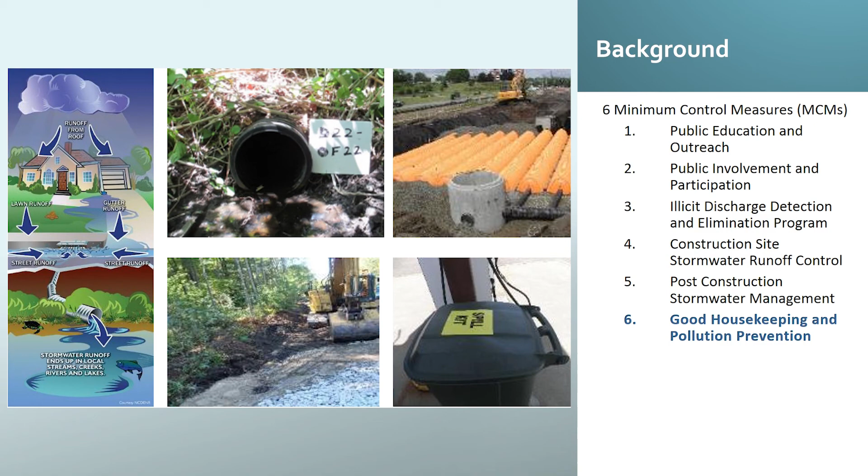But I want to make a note about MCM6. Today we're going to specifically be talking about the development of a SWPPP and then the catch basin cleaning, inspection, and maintenance program. There are other requirements of MCM6 that we're not going to specifically talk about today. That includes the development of an inventory of all your municipal operations and facilities, the development of O&M plans, and the street sweeping program, as well as a few other requirements.

So I just want to give you the heads up that we're going to be talking about 2 specific components of MCM6.

So a SWPPP - what is a SWPPP? It is a Stormwater Pollution Prevention Plan, and it needs to be a written document. But don't get confused and confuse it with a stormwater management program or stormwater management plan, which is also required by the MS4 general permit.

Think of the stormwater management plan as the master plan for your MS4 general permit. It will outline the requirements of, or outline the ways, the intent of how the MS4, your community, will meet the requirements of the MS4 general permit.

The SWPPP is specific to your facilities. And you probably are familiar with SWPPP - it's not a new term. It's been used in other contexts outside of the MS4 general permit.

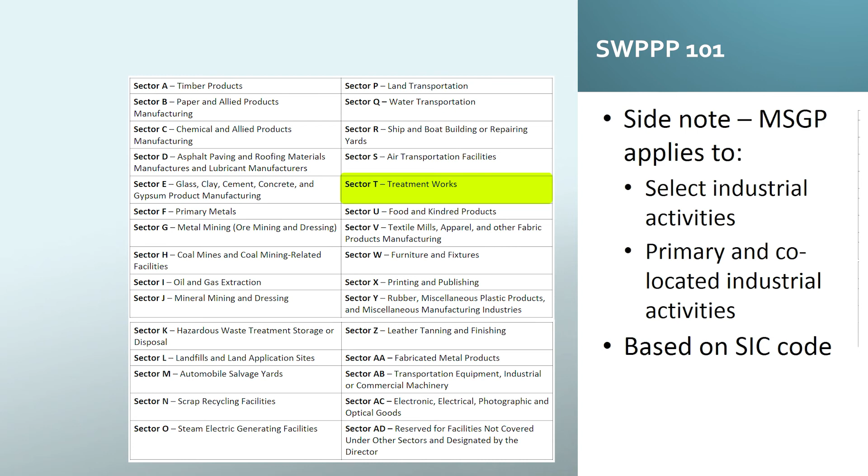You probably would most be familiar with Sector T, which is treatment works. So many municipal wastewater treatment plants are required to have a SWPPP under the multi-sector general permit. The permit applies to the primary or co-located industrial activities at a facility, and it's based on the SIC, the Standard Industrial Classification Code, on how you get pulled into the multi-sector general permit.

There could be instances where your facility has a SWPPP under the multi-sector general permit. For instance, transfer stations could be pulled in under Sector N, scrap, recycling, and waste recycling facilities, SIC code 5093, in particular for recycling facilities that receive source-separated recyclable material primarily from non-industrial and residential sources. If this were the case, a SWPPP for that facility would not be needed under the MS4 general permit.

Also remember, if facilities are co-located, you only need one SWPPP that covers both facilities.

So what facilities require SWPPPs under the MS4 general permit? All maintenance garages, public work yards, transfer stations, and other waste handling facilities that would have the potential for pollutants to be exposed to stormwater.

And if you happen to have co-located facilities, say your public works garage and your maintenance garage are on the same site, only one SWPPP is required for co-located facilities.

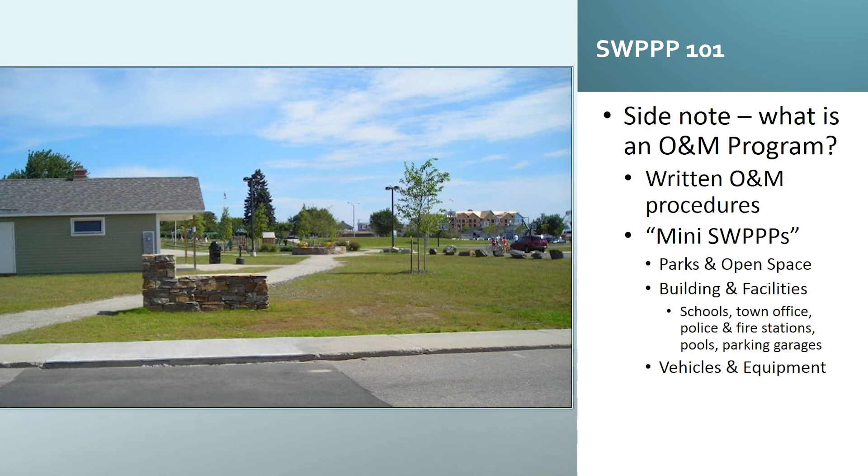This includes parks and open space, buildings such as schools if they're under the jurisdiction of the municipality, your town offices, police and fire stations, municipal pools, and parking garages, as well as vehicle and equipment activities.

Some examples of O&M topics that would be included in your O&M program would be the use, storage, and handling of products, landscaping activities and lawn care, pet waste handling, and waterfowl congregation.

It also needs to include a training component, dumpsters and waste management, parking lot sweeping, spill prevention, and then vehicle fueling, storage, and washing.

So back to a SWPPP. What are the required elements of a SWPPP? We will go into more detail on each one of these, but a SWPPP must include a pollution prevention team.

A description of the facility, both an identification of the potential pollutants as well as a map, identification of all the stormwater controls at the site, management practices that will be implemented to prevent pollution, an inspection component, and then of course record keeping. There is a template SWPPP that has been developed by the Central Massachusetts Regional Stormwater Coalition.

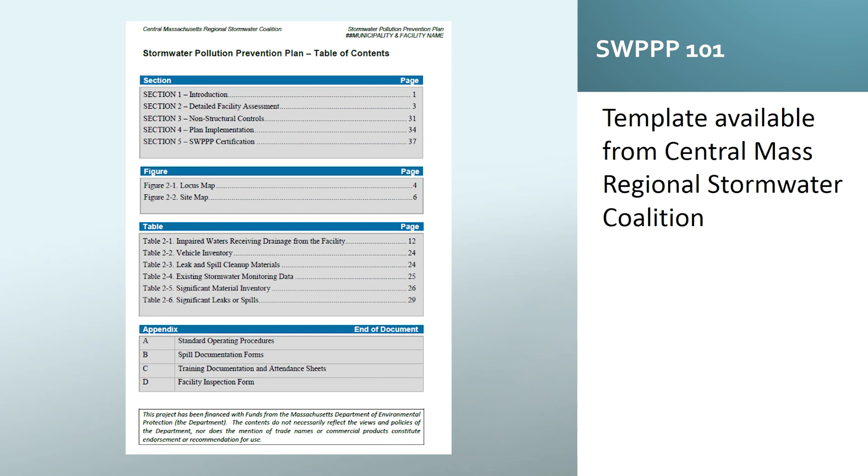It's available on their website. There are also other SWPPP templates available, and guidance on the development of SWPPPs under the multi-sector general permit, which can be very helpful in the development of a SWPPP because a lot of the components are similar. So there is guidance out there for you.

So, a pollution prevention team. You need to identify all the staff on the team by their name and their title, identify their roles on the team, and the role of the team itself is to develop, implement, maintain, and revise as necessary the SWPPP for the facility.

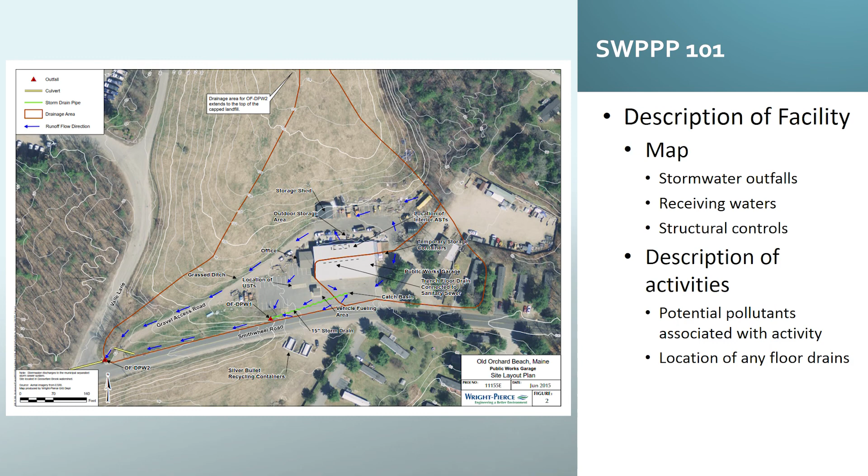The description of the facility needs to include a map showing stormwater outfalls, receiving waters, and any structural controls that are on the site. I would personally recommend that your map is very detailed, including a lot of information, more than the minimum. Include where you have all your potential pollutant sources and your activities on your site.

It's a good point of reference for implementation of your SWPPP. You could show flow direction so you and your staff understand where the stormwater on your site discharges to.

You also need to include in your SWPPP a description of activities, the potential pollutants associated with each activity, and the location of any floor drains.

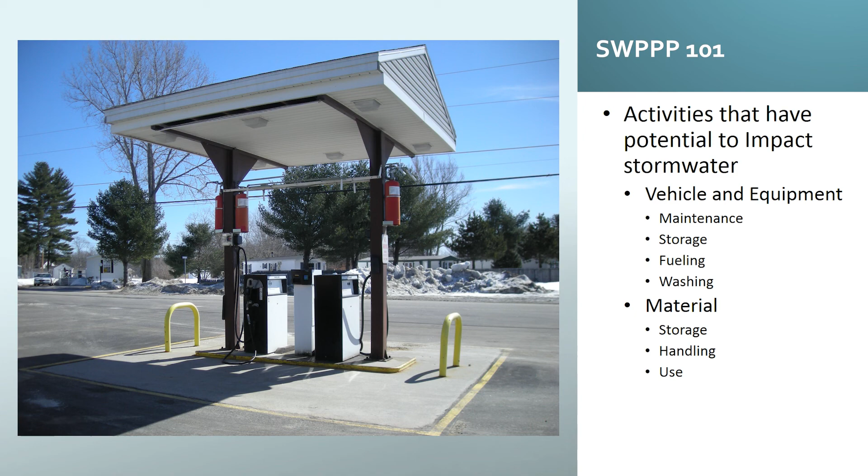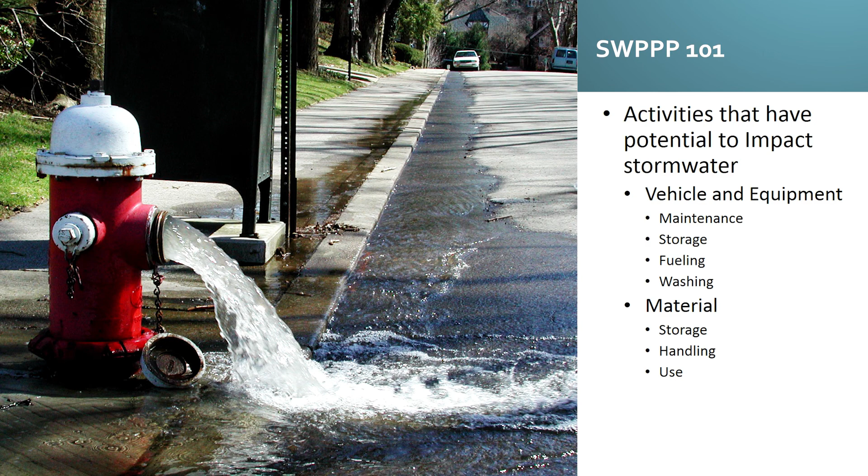So what type of activities have the potential to impact stormwater at your municipal facilities? Vehicle and equipment maintenance, storage, fueling, and washing play a big part in potential pollutants, as well as material storage, handling, and use. Another activity that may occur on your site, for those that have hydrants, is hydrant flushing.

What activities and areas at your facility are exposed to stormwater and have the potential to impact stormwater?

We've talked a little bit, very briefly, on the type of activities you have at your facility. So what type of potential pollutants would these facilities create?

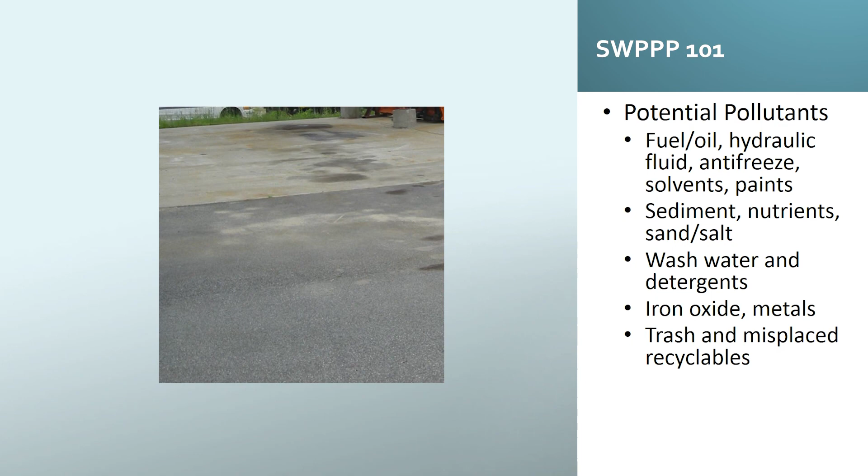You could have fuel and oil, hydraulic fluid, antifreeze, solvents, and paints. You could have sediment and nutrients, as well as sand and salts, wash water from vehicle washing and detergents, iron oxide and metals, and trash, as well as misplaced recyclables, especially if you have a transfer station or accept recycling at your facility.

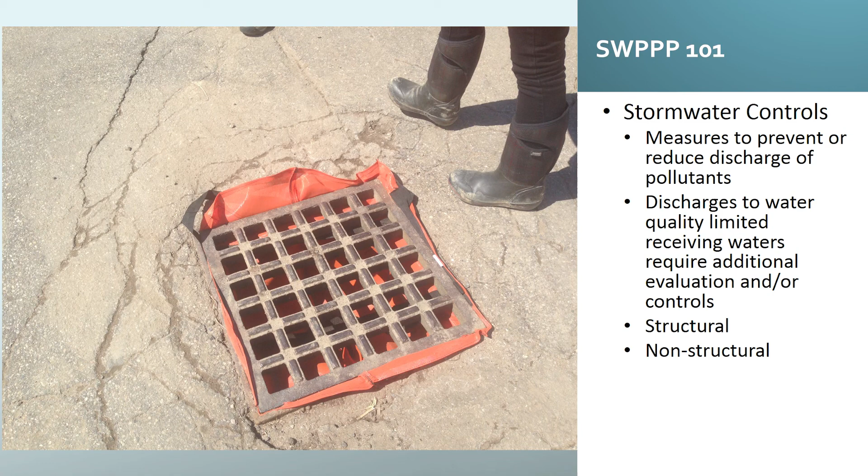So we've talked about the activities that you have on your site and what potential pollutants those activities create. Now we're going to talk about how you control those pollutants and prevent the discharge of pollutants from your facility. You need to implement measures to prevent or reduce the discharge of pollutants.

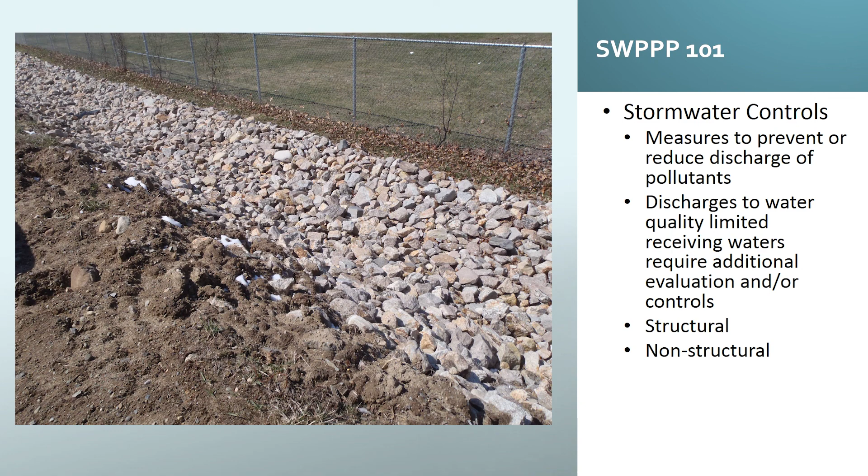If you have discharges to a water quality limited receiving water, meaning a water body that does not meet its designated classification, you'll require additional controls and evaluation. Your stormwater controls can be both structural and non-structural.

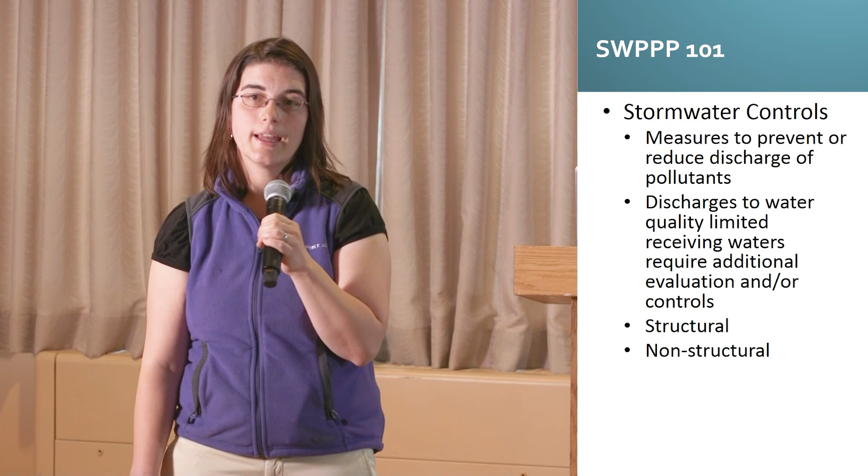Management practices is the heart of your SWPPP. They are the practices that you implement on a day-to-day basis and over time to prevent pollution from your facility. We will talk more about management practices in Module 2, but I'm just going to list the activities now.

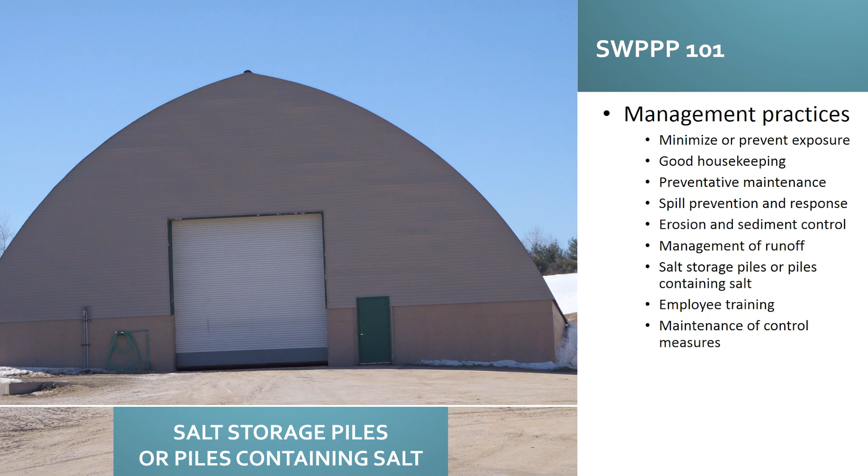Minimize or prevent exposure, good housekeeping, preventative maintenance, spill prevention and response, erosion and sediment control, management of runoff, salt storage piles or piles containing salt, employee training, and maintenance of control measures.

Like I said, we'll go more in detail on the management practices in Module 2, but I want to review just a few examples of management practices that can be implemented for common areas and activities at your facility.

So, vehicle storage: you should store vehicles inside or under cover. For vehicles that require maintenance and are potentially leaking, you could put a drip pan under them to collect the leaking product. You should conduct all maintenance inside. And during the summer, when you're storing your plows, you can cap your hydraulic lines.

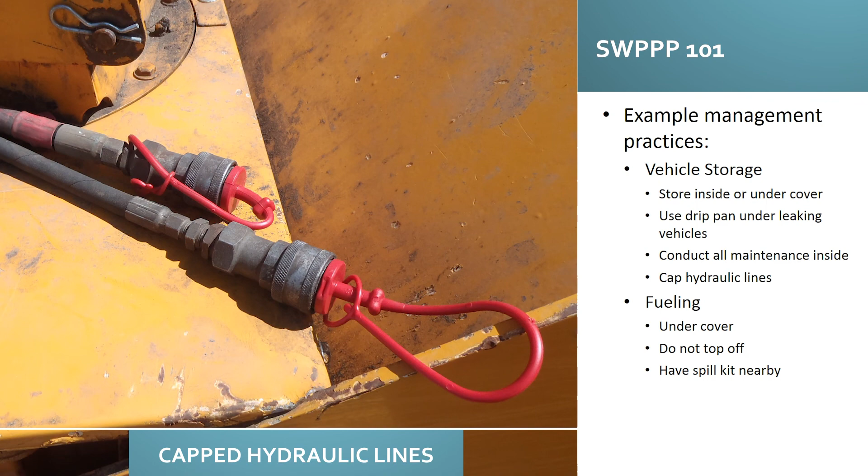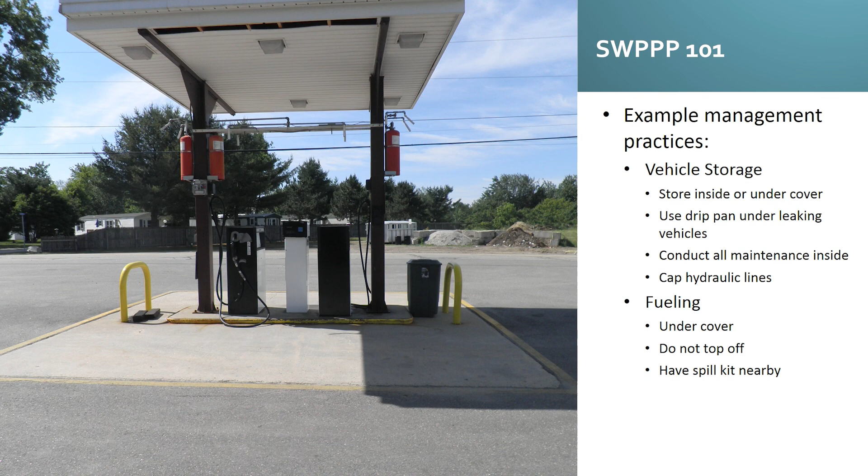For fueling activities, you could keep them under cover with a canopy. Do not top off when you're fueling. And have a spill kit nearby, and make sure it's well stocked. Don't just have the kit—make sure it has stuff in it.

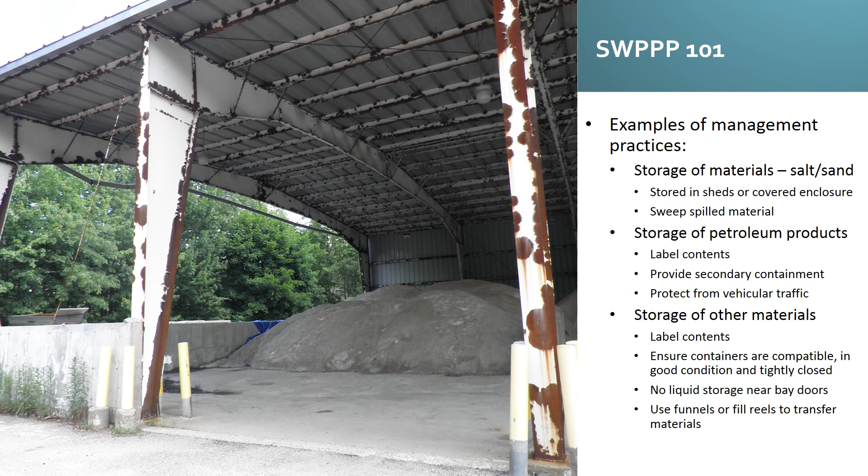Some more examples of management practices in terms of storage of sand and salt: make sure it's stored in sheds or covered in an enclosure, and sweep the materials that end up on the ground when bringing material in and out of the storage area.

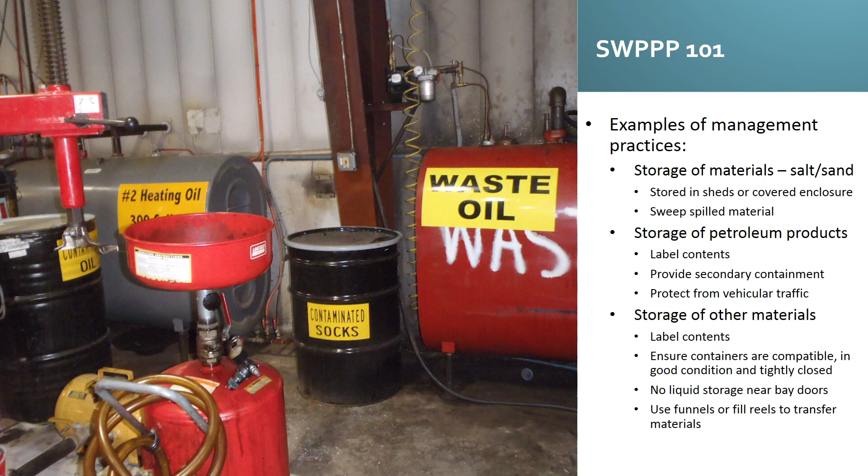For storage of petroleum products, label the containers. This is a very easy and effective control measure. Make sure you know what is in your containers and have them clearly labeled so there's no question about what's in that bucket or drum. It's preferred, and required for storage capacities over 55 gallons, that they're labeled. You should provide secondary containment, and protect containers from vehicle traffic with barriers, bollards, or a concrete berm.

For other types of materials, ensure that what you're storing the material in is compatible, in good condition, and tightly closed so it's not going to leak. Don't store liquid storage near your bay doors because containers could get easily knocked over. Use funnels or fill reels to transfer materials.

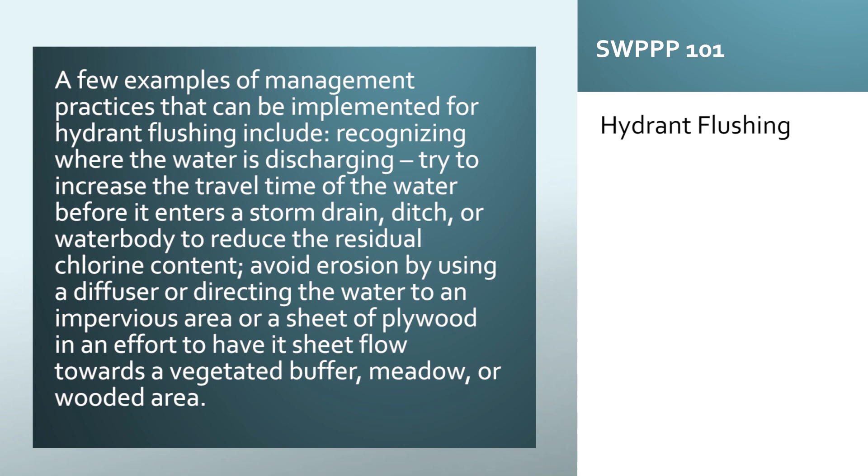A few examples of management practices for hydrant flushing include recognizing where the water is discharging, trying to increase the travel time of the water before it enters a storm drain, ditch, or water body to reduce the residual chlorine content, and avoiding erosion by using a diffuser or directing the water to an impervious area or a sheet of plywood to create sheet flow toward a vegetated buffer, meadow, or wooded area.

I want to talk a little bit about vehicle and equipment washing. This is one of the big areas of a SWPPP. The preferred method of vehicle washing is indoors in a designated area, with the wash water discharging to the sewer through an oil water separator, or to a Mass DEP approved certified tight tank that is hauled by a licensed hauler.

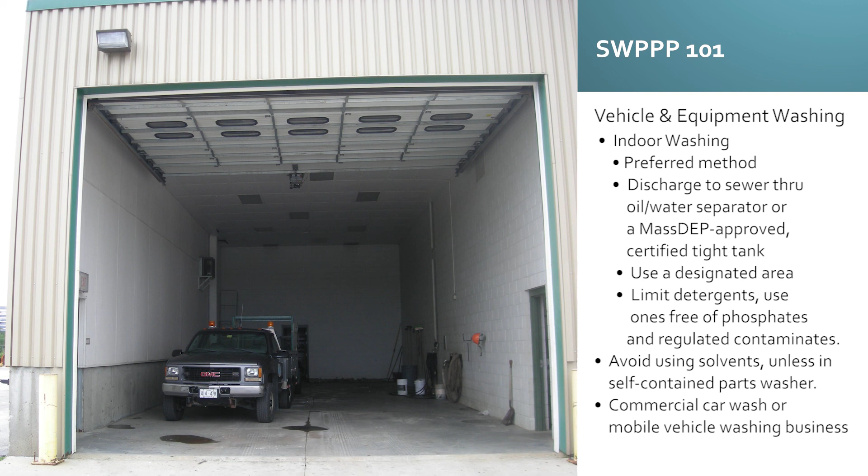You should limit the use of detergents and use ones that are free of phosphates and regulated contaminants. Avoid using solvents unless it's in a self-contained parts washer. If indoor washing is not an option on your site, you could use a commercial car wash or a mobile vehicle washing service for light-duty vehicles.

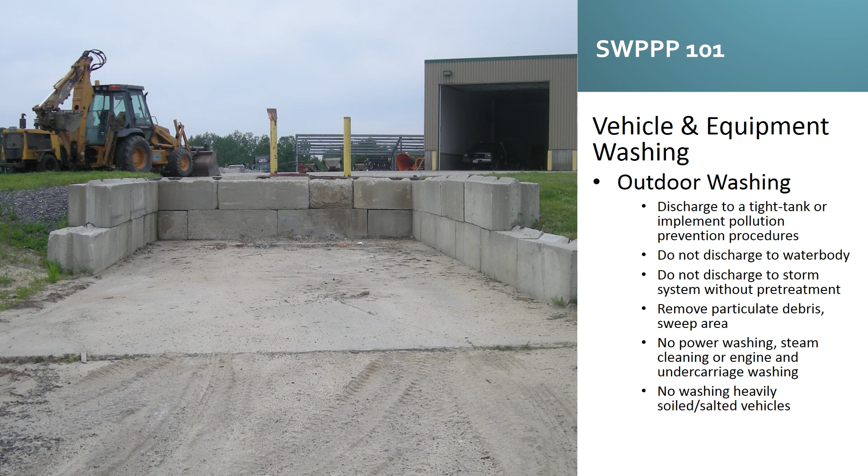If washing indoors is not an option and you can't do it off-site, outdoor washing is an option but requires more management. The wash water needs to discharge to a tight tank, or you need to implement pollution prevention procedures. The wash water cannot be discharged to a water body, and wash water cannot be discharged to a storm system without pretreatment.

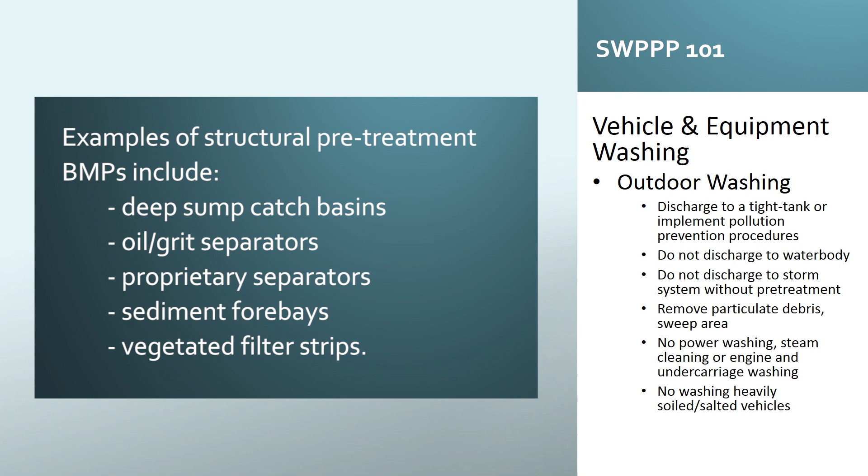Examples of structural pretreatment BMPs include deep sump catch basins, oil grit separators, proprietary separators, sediment forebays, and vegetated filter strips. You also need to remove any debris in the washing area and sweep it regularly. If you do outdoor washing, there should be no power washing, steam cleaning, or engine and undercarriage washing, and no washing of heavily soiled or salted vehicles in that area.

Another component of your SWPPP is site inspections. All areas exposed to stormwater and all stormwater control measures need to be inspected on a quarterly basis. We'll talk more about inspections in Module 2.

Record keeping is another component of the SWPPP. It's sometimes overlooked, but it's very important. You need to maintain documentation of required activities, such as maintenance, inspection, and training. You need to maintain all records related to the development of your SWPPP for a minimum of 5 years, and you need to make these records available to the public.

Record keeping can be accomplished in the form of paper files, for instance a 3-ring binder that includes the SWPPP itself and all supporting documents related to its development and implementation, or with electronic files. It's recommended that all documents be kept together in the same location at a facility, whether it be a binder on a bookshelf, a file in a filing cabinet, or a folder on the computer.